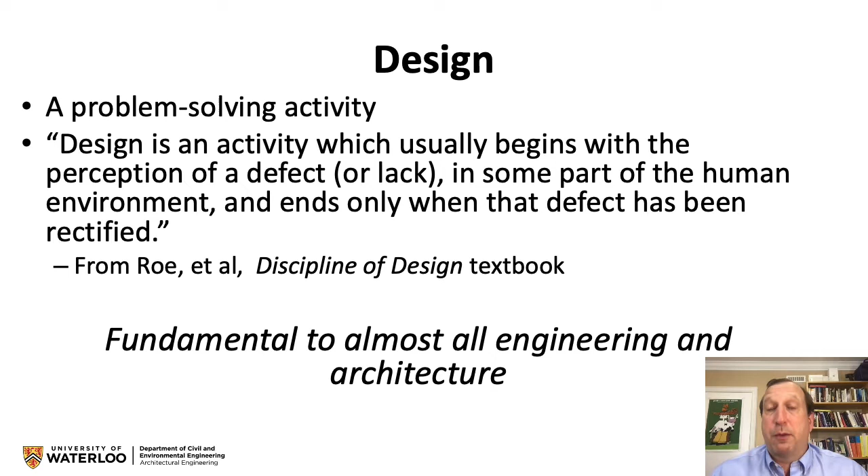A great textbook by a number of University of Waterloo professors is called The Discipline of Design. And in it, a more formal textbook type of definition is given. Design is an activity which usually begins with the perception of a defect or lack in some part of the human environment and ends only when that defect has been rectified. And that's intentionally a very broad and formal definition. So whatever you want to define and how you tweak those words, at the end of the day, design is a fundamental part of engineering and, of course, also of the practice of architecture.

Now, one has to also recognize that design is an activity, meaning a verb. Design can also be a product. That car is a good design. But design is also the set of drawings and specifications that are used to make a product. So design has a number of overlapping and correct definitions and uses in the everyday language. But one thing that's important to recognize is that design is not an aesthetic activity alone. Obviously, aesthetics play an important role in many design decisions. However, design is much deeper and broader than that.

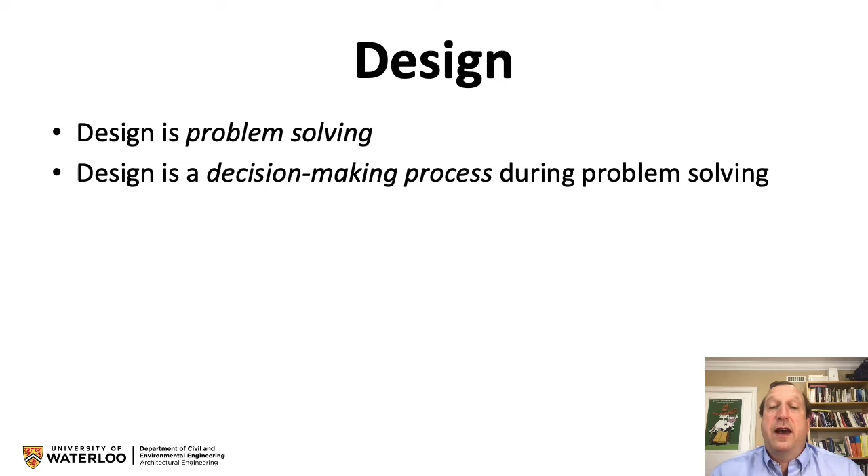So, just to start with, as I said, design is a problem-solving activity. So design is not something for sport or entertainment or spiritual upliftment. Design is solving a problem. And since we're talking normally about humans doing the design, it is a design of a human concern. So when you're doing a design, the major activity that one does as you follow through the process is you're making decisions. You're solving the problem, but making decisions about what's important, what's not important, what the problem is, what the problem isn't. All of those things are decision making.

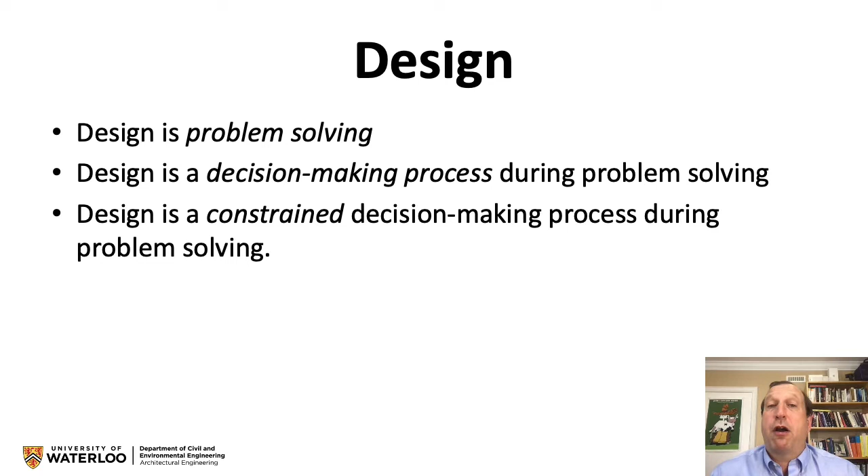And so a lot of the theory of design is actually, when they study the process, they realize it's a decision-making analysis that needs to be done. How do you make the decision at every step of the way? And there are many decisions in real designs. Now, it's also a constrained decision-making process. So one of the things that differentiates design from, say, art is that design has constraints. You don't have a lot of time. You don't have enough knowledge. You don't have enough money, etc. You can't make it beyond a certain weight. It can't burn. All kinds of constraints, of which there can be identified many hundreds and thousands for most common products that are designed. And that includes buildings.

So design can be applied to the process of planning. You're planning a path from your current location to the nearest Starbucks to get a coffee. That could be a design process because you're solving a problem by making a series of decisions, and maybe you remember your decision for that design, or maybe you even write it down as a series of steps for someone else to go get you that coffee at the nearest Starbucks that you know where it is. So the design process almost always involves those types of instructions and planning. And also, it can be part of creating a thing.

Most of the challenge of modern technical design is that we separate the creation of the object from the design. So there are two separate stages. You design the shape of, say, the binocular case, and then you have to design the process by which it's made, and then you actually do the execution of making the case for the binoculars. And in the building industry, we design the building, and then we design the process by which it will be constructed. And then there's a lot of executing of actually building the building.

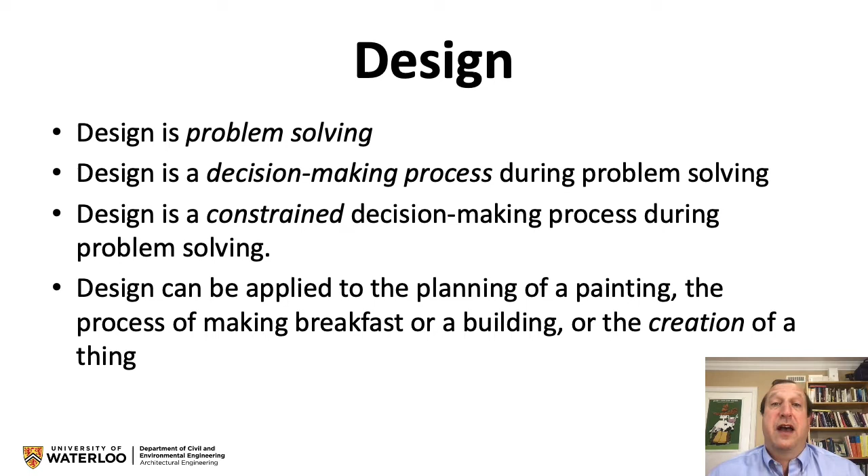And during that process, in real life, we find out that we maybe haven't totally sorted out the design, meaning what is the building, or we haven't totally designed the construction process, that is how we will build it. So we have to continue to make decisions during the construction process, which is actually an extension of the complete design process because we aren't done yet.

So if we want to describe what design is in sort of maybe a more applied way, another tack we can take is to say that the design of physical objects, as opposed to systems or software, involves the selection of materials, forming or shaping them, and then arranging them to meet a particular purpose, to solve a particular problem. So let's go over that. Select materials, form or shape them, arrange them relative to each other to solve a problem. That is much more of a description of the building design process right there.

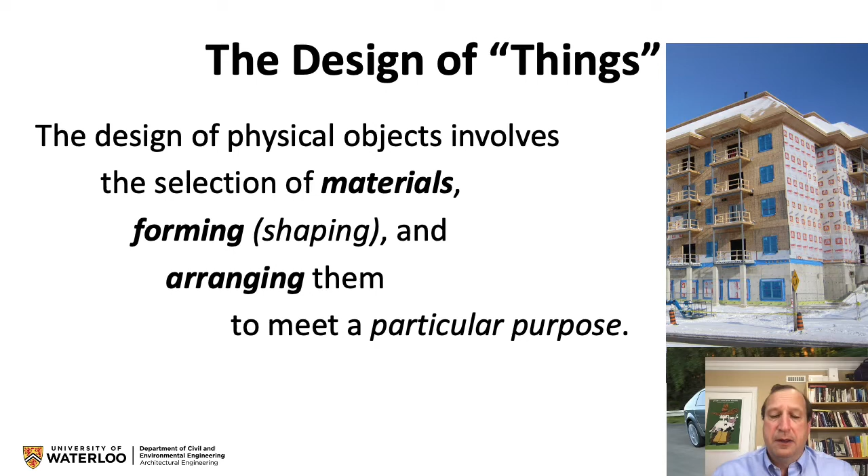Now, there are numerous books which I would welcome you to read, and I have at least 50 of them, on the design process, technical design, engineering design. And they all have variations on this theme, and it's worth thinking about and understanding those different variations. But I'm going to move on now from the definition of design, and I'm going to start looking at some examples and some case studies.

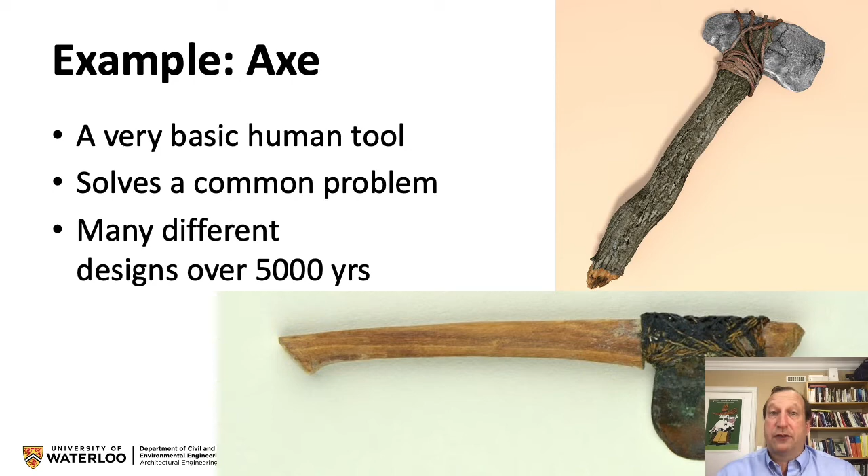So a pretty old, in terms of human history, design of a tool is the axe. It's very basic. It's been around for tens of thousands of years in the archaeological ruins of human habitation. And it solves a common problem. But I think we have to be careful that when you look at the designs for axes over the last 5,000 years, you will find that there are a lot of different designs. And if you look at the designs that are available today by doing an internet search, you'll find there's also a large variation. So why are there so many variations if they're solving the same problem?

Well, the first step there is they aren't solving the same problem. Certainly, the types of axes we have today are quite carefully designed for very particular problems. So there is the firefighter axe, which is meant for chopping through walls and roofs and car doors in terms of freeing someone from a wreckage or a fire, which is a very different type of axe than would be the type used to split pieces of wood into smaller pieces. There's one that's meant for peeling the bark off of trees. There are types of axes that are meant to split large and difficult to split chunks of wood. So we end up with a whole bunch of different solutions.

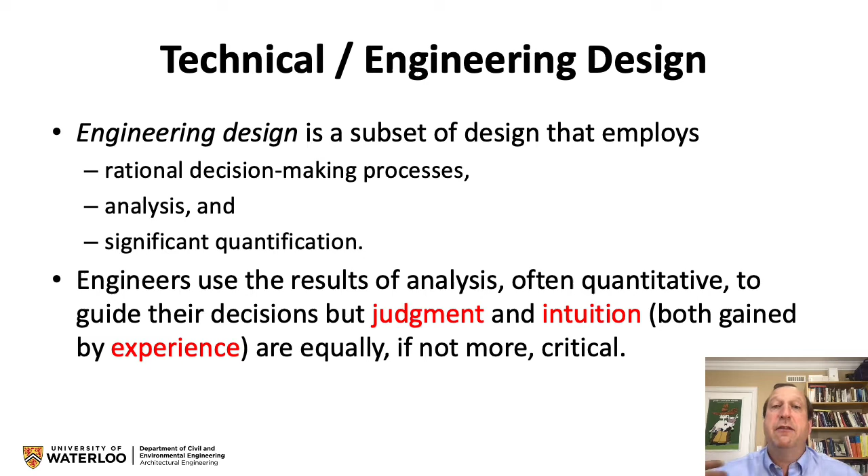The best way to get judgment and intuition is by experience, which means doing a bunch of designs, evaluating their success. And of course, since we can't do all that many designs, we learn the most by looking at other previous designs that are similar and try and understand what resulted in that design quality, good, bad, indifferent, and how would that sort of decision making influence my current design.

So the use of rigorous decision making will often end up with coming to similar conclusions. This is not bad design or a lack of creativity. This is good design, and it is showing that the type of solutions might actually properly be very similar. So trying to steer a design in a different direction, or sometimes we use the term innovative, that's dangerous because it could push you away from the best design. Just to be different doesn't usually solve a problem.

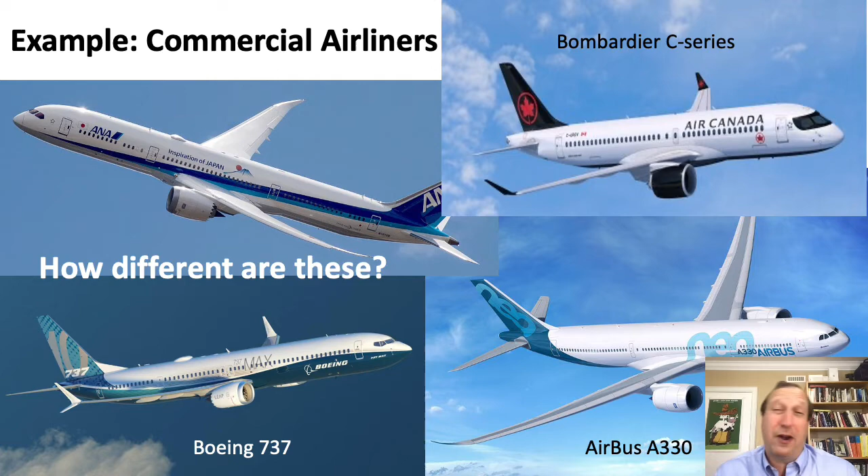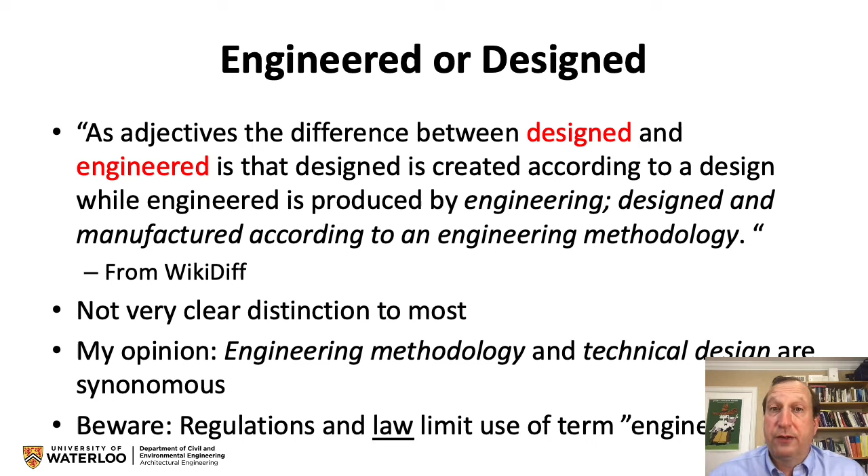And part of those reasons have to do with the law, in that when we are being asked as professional engineers to design a building, it often does rely on engineering, which means some analysis, some rational method, and compared to physical laws, following the physical laws, comparing to physical performance. There's an expectation in the law that when you are asking for an engineered design, that is the process. You can't rely on what your gut says or what your heart demands.

This is another expensive object. I'm just showing it closer to Earth. And many of you may not realize, but these types of offshore oil rigs routinely cost more than $5 billion. And a majority of that money is tied up in engineering the manufactured object, and very importantly, the process by which that product is created and delivered and brought online as a functioning object.

This one happens to be in Canada's offshore area on the East Coast, Hibernia, and it's $10 billion. It's a bit more expensive because A, it's big, and B, the weather sucks. And so dealing with icebergs and ice storms and hurricanes and all the rest of it means that these offshore oil rigs were very expensive.

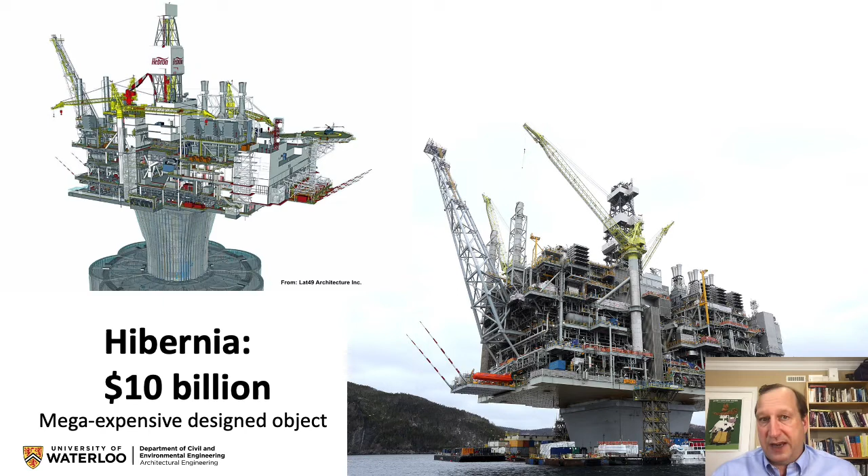But also, as we move to a world where burning and extracting carbon is less and less desirable, I hope you can see that we have developed the technology and the design ability to solve some pretty incredible problems, and the ability to generate the funds, $10 billion in this case, to justify them. And so some of the newer low carbon technologies seem like they're rather exotic or rather expensive or rather large, but that's only in comparison to, say, everyday life, not in comparison to the fossil fuel industry, which has taken on the largest, the most expensive, the most technologically demanding problems up to and including spaceflight. So we can apply the same design and technology for other reasons.

So when you have projects of this scale, you can imagine that design is almost always engineering design. Whichever profession did it, whether it's architecture, technologist, whatever, we need to use rational analysis and quantify our decision making to justify the expense and reassure the investors that the expense is going to be protected.

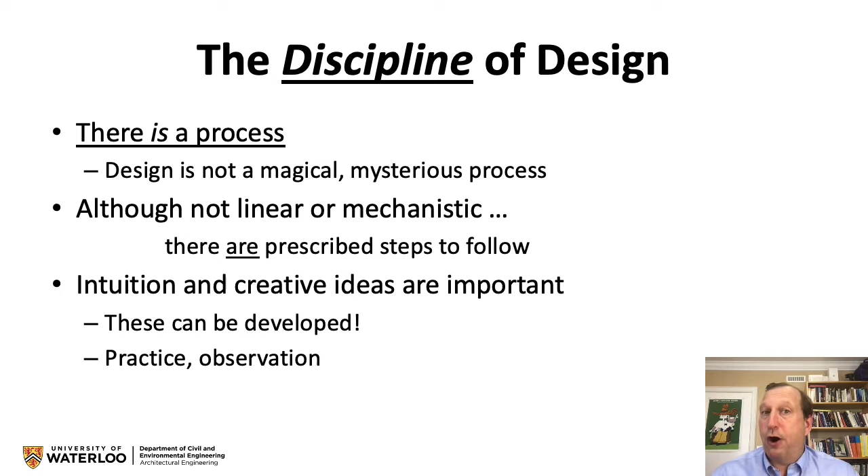So this brings us all to, let's now talk about the discipline of design. And that word was carefully chosen in the textbook because design is not some sort of lightning bolt from the heavens that inspires you. Design is a process. And in fact, a lot of good design comes out of simply following through on a good process. That doesn't mean that creativity, inspiration, intuition do not play an important role. They do. But it's not just about inspiration and intuition, both of which are developable. It is actually a pretty clear process.

So there are many ways to break down the process, but I can tell you there are entire textbooks that explain this process, and some of them break it down into 27 steps, some of them break it down into 5 steps. I've cribbed together, by reading all of those, a 5-step process that works well for architectural engineering and a fair number of other processes as well.

But the first step, I think, is pretty clear: defining the problem. And then you review previous designs, called precedents. You look for solutions that might solve that problem. You evaluate your proposed solution, and this is where the engineering analysis, computer simulation, and various calculations come in. And then when you've decided that you have the best design you're going to come up with, you document what that design is so it can be implemented. In our case, it can be built.

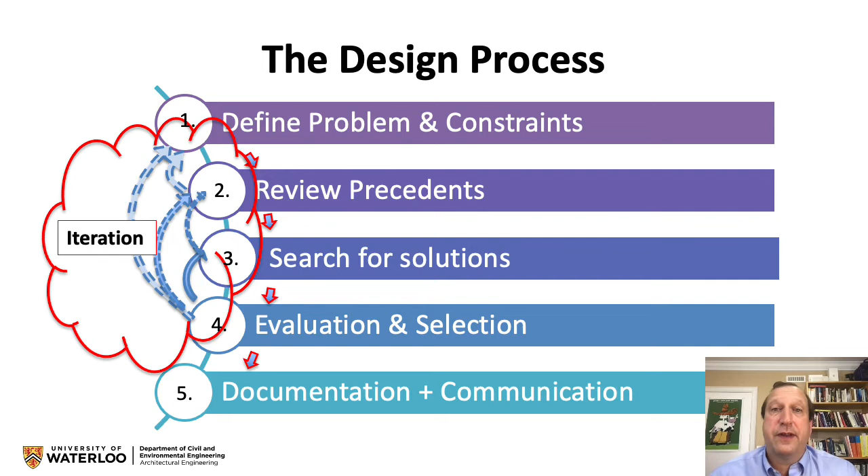What's important to realize is that there is a whole bunch of iteration, and that when we define the problem and identify limitations or constraints on the design, we don't just leave that forever. As we go through and look at previous problems that were similar and the design solutions, we may learn that, oh wait, there are these other restrictions, constraints. There are other problems that we need to solve at the same time. And that means you might then cycle back from step 2 to update step 1. And then you go to step 3 in terms of looking for solutions to the problem.

Now, when you've searched for solutions, and by search for solutions, I mean you create them, you look around the world for ones that are exactly what's needed for your problem with your constraints, you may end up having to go back and look for other precedents. You may have to go back and change some of the constraints. And that's why these arrows are important, to say sometimes you skip over and back and then revisit and adjust. And so the process isn't this simple linear thing.

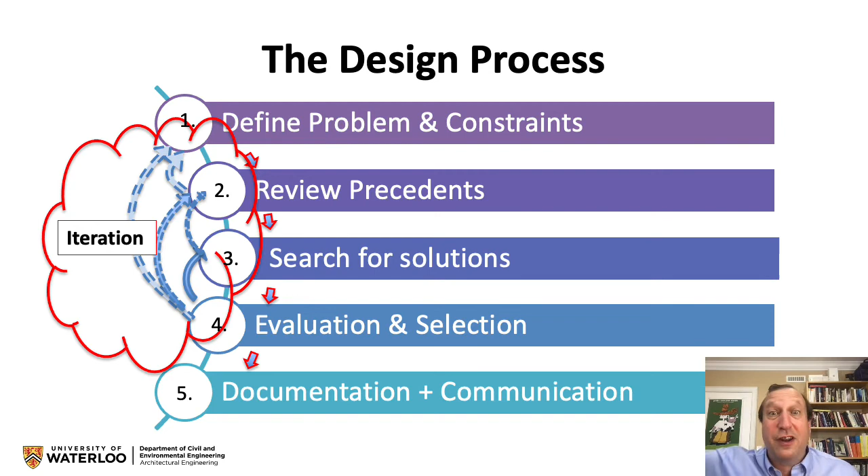And I can't tell you how much time you should spend on each step. But I can say there is a reason to do every step. Some design projects will require you to spend a lot of time on one step and not much on another. And other design projects will invert that, and you'll spend a whole bunch of time on a different step and no time on that step. So let's just look a little bit at these 5 steps.

The problem definition and identification of constraints is really important. Defining the problem is far more important than most people recognize. And so being able to really zoom in on what problem do we need to solve? This is often the place where genius comes in: people see a different version of the problem that hasn't been articulated or developed before. And so that sets them on the way to a really effective design solution because they had nuance in their problems. And in that problem definition, you need to do this very much with an open mind and actively try and look at it from different perspectives.

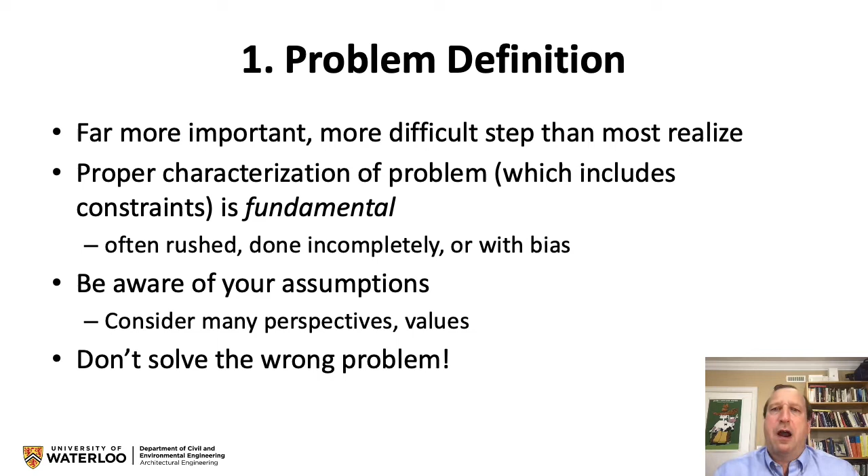Some of the simplest examples of that I can give you: don't design things that only work for right-handed people, because there are left-handed people in the world and not a small number of them. Don't design for people who are 5'11" tall, because there are many, many adults in the world who are 5'2" tall. And if you intend to include children, then you now have to start designing for 3-foot tall people. And what about people who can't walk very well, or need a wheelchair or a walker, or use a cane, or have bad vision? All of those factors actually add constraints to your design solution and are a better refinement of your design problem that leads to better and different solutions. So various perspectives is the best way of getting this.

I'd mentioned that this is a well-known problem of not spending enough time defining the problem. In fact, at the University of Waterloo, which is home to hundreds of startups, it has been observed that it is such a problem that they have created the Problem Lab. One of our faculty who had spent a lot of time in the startup world actually went out and raised some funds from Silicon Valley venture capitalists, etc., to start this lab, because the problem is that people are not defining the problem. They come up with a solution as an app or a widget, and they've never spent the time figuring out what the real problem is. So you can go Google this, check it out, and it just shows how often this step is jumped over or given short shrift.

Constraints are a critical part of your design. Depending on the constraints, the exact same design solution could be a good one or a bad one. So when you're starting a project, not only do you need to define the problem very well, you also need to document the constraints. And really, it's helpful to write it down to keep it aware all the way through the process of what is constraining your design solution.

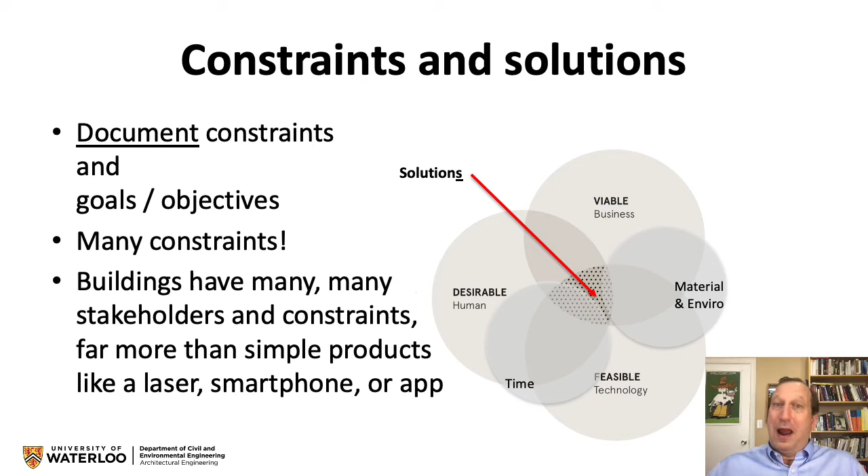And when you're doing that, you're often going to collect some of those constraints together, put them in buckets. Often you're doing this in a brainstorming process to say, what are all the limits on what you are allowed to do? Now, some of those limits that you can quickly identify and even quantify in many cases are things like cost and schedule and safety, regulatory compliance, skill available, knowledge available, technology available, materials available. All of those deserve to be on most design lists as constraints, because there's some limit on all of them.

Now, again, I go to comparing art and design. This is a quote from David Pye, a famous author, saying the thing that distinguishes design, or technical design, really, from such arts as painting and sculpture is that the practitioner of design has limits set upon his freedom of choice, meaning they can't just choose to make a very heavy object or a very large object or a very expensive object because there are real constraints.

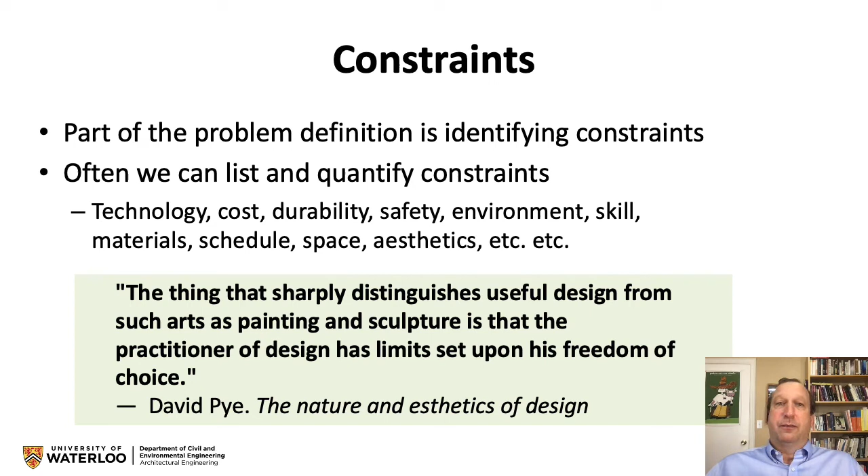Now, precedents is step number 2. Step number 1 was identifying the problems and constraints. Step number 2 is look at what others have done before you. Learn from the successes and, just as importantly, the failures of others. So it's useful if you can find failed designs, sometimes hard, but certainly you can find successful designs that tend to be close to what you're working on. Just remember, before you can think out of the box, you need a box. And so that box is your precedents.

How do people normally solve similar problems? So what we can do is look in other industries or at different scales for what solutions have been done. Look at how people did it at different time periods, because you might get lessons there. Now, you need to analyze this and make sure that for the precedents you're choosing, you understand which constraints are different, what has changed since that design, how different is the problem, and that usually explains why their design is not perfect for your problem. But identifying that difference is a useful thing and can help you come up with a better design.

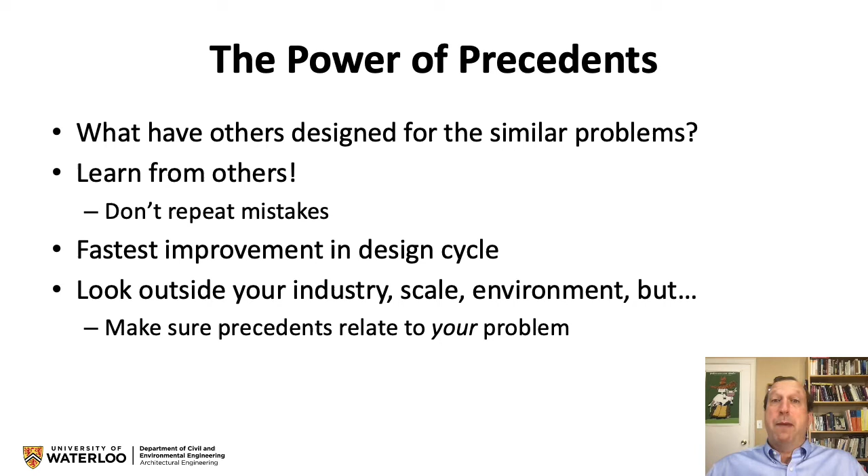So now we have to go and look for solutions. And the solutions that you're looking for often seem somewhat magical because they're pulled out of the blue sky. But they're not really pulled out of the blue sky. After you have done a good job of defining the problem, identifying the constraints, and exploring many previous solutions, well, that's not blue sky anymore. You are now steeped in the design process, and many times then new solutions can be proposed. Now, when you propose a solution, you don't know that it's a good design. That's the thing that comes from nowhere, is the solution.

And now you need to assess whether it's a good solution, which is why this quote from Thomas Edison, and actually he was a person who used a real process. He hired hundreds of people who tried dozens and dozens of prototypes and variations on particular problems that they were working on. It was a complete industry to come up with invention. And this process was very much used by Edison. He says, "I have not failed. I've just found 10,000 ways that won't work." And each of those ways that don't work is useful information for others.

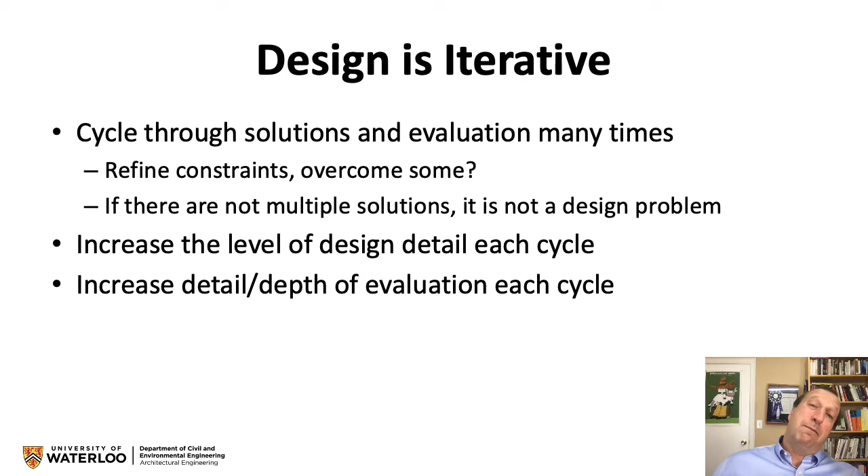So, as I've said, you're going to iterate between these levels, and that's very much something that happens as you're coming up with proposed solutions. And also, you propose a solution or 3, you pick one, then you get deeper into the one that you think is the best. And as you add detail to the design, you discover new questions that need to be answered, which may push you back to the problem definition, push you back to the constraints.

So as we go from cycle to cycle, as we iterate through, we are going to make some of our designs worse. We'll make changes and we'll find out they're worse. And therefore we'll go back to the first design or try something else. But trying a bunch of solutions is critical, because we can often not be sure that a design solution is the best answer. The best we can do is to come up with 2 design solutions and show that solution A is better than B.

You still don't know A is the best, but you now can be sure A is not the worst. And if you have 5 solutions, A, B, C, D, and E, you might say C is the best. A was almost as good. E is a total dog. As soon as you start having multiple solutions to compare and contrast, you have a much better idea of the size of the solution space and where your best solution fits within that.

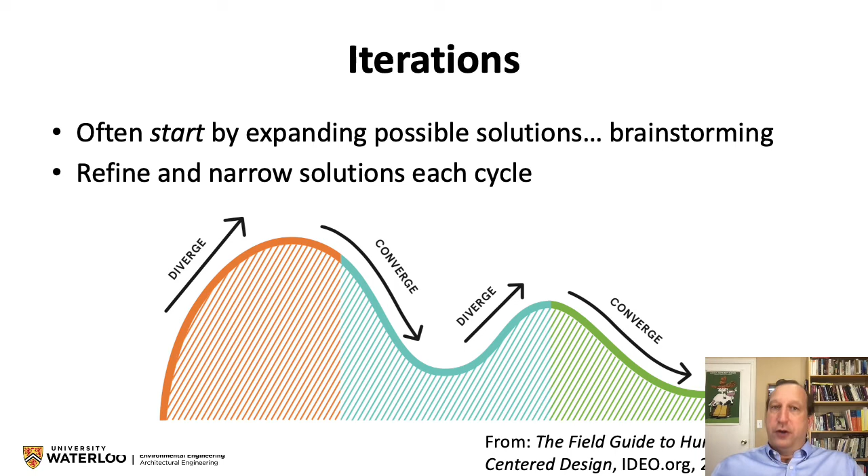So we often expand options as we begin the design cycle. Then as we analyze and compare to constraints, we weed some solutions out, tweak some solutions to have fewer, and then we go through another cycle of this. One of the realities that we've learned and documented about the design process: as we go through each cycle of design, we learn more because we've been working on the project. We learn more precedents. We understand more about the constraints, more about the problem.

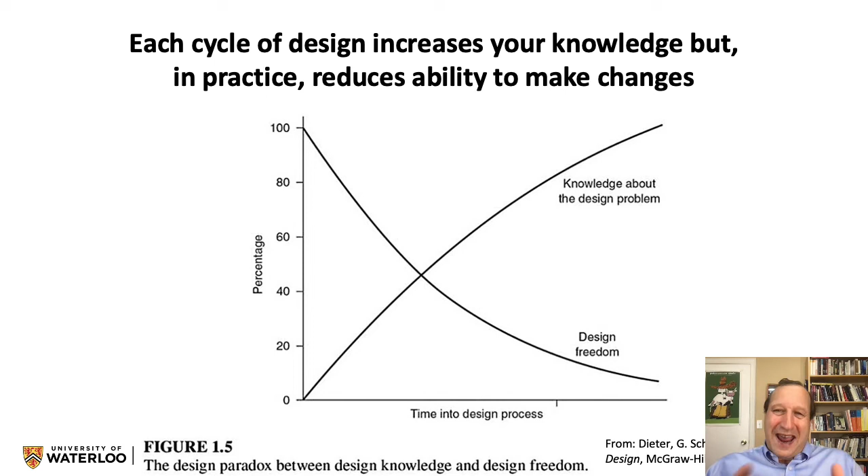But as we work through, we also tend to have less freedom of design because we're running out of time and we're running out of resources, and we have to make decisions because, at the end of the day, particularly engineers, we have to solve the problem. And so we end up learning more, but not always having so much flexibility anymore.

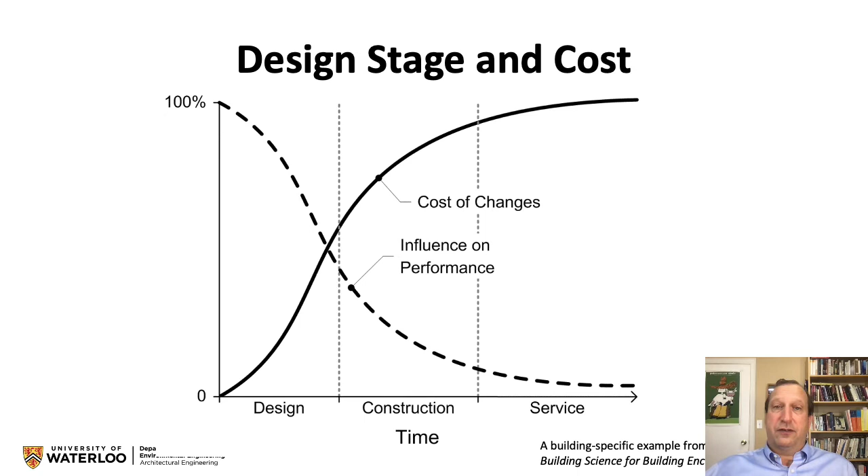Step number 3, this is the search for solutions. I can summarize here that we're going to have multiple solutions, and it's not enough to have one solution that works. We need numerous solutions so that we can compare them and rank them. The challenge in our design, because of this time factor, is that we want to get quickly into our design space, quickly evaluate rough designs so that we can, earlier in the process, zoom in on viable, likely solutions.

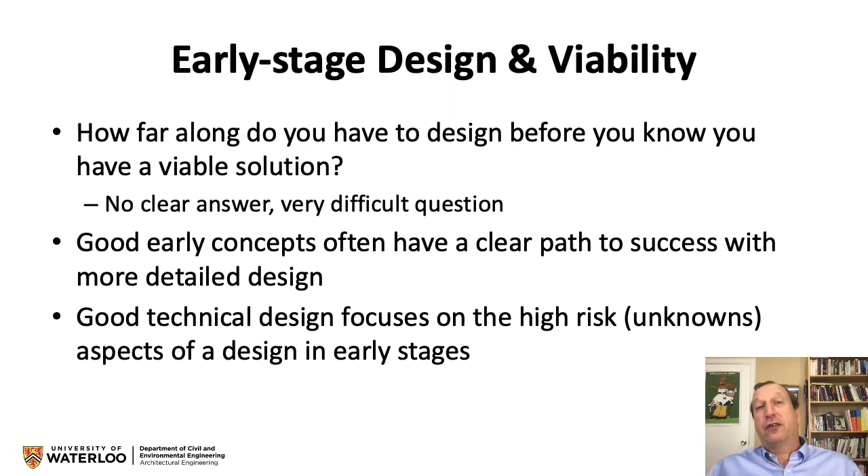And this is what actually tends to happen in real technical design projects: we focus on the biggest bang for buck, most uncertainty at the beginning of design, leaving accepted and understood things to later in the design, where we know the answer better up front. So these are the subtleties of experience in design, design in a particular discipline, that let us know: is this a good first choice or a bad first choice? What should I focus on?

Now, one of the things I thought I should mention here is that in our design solutions that we propose, complexity is often a problem. In the modern world in particular, we have so many options for materials and systems. We have so many people involved, so many constraints that limit our designs, that just managing that complexity is a major deal. And that's why striving for simplicity at the early stages can be a very powerful strategy. Just try and keep it simple at the beginning.

I love this quote from John Gall; there are variations from various people, but he says, a complex system that works is invariably found to evolve from a simple system that worked. The inverse proposition also appears to be true. A complex system designed from scratch never works and cannot be made to work. You have to start over, beginning with a simple system.

And this partly can come out of your assessment of precedents, but when you look at a modern car, there's no way that somebody could start to design a car with today's complexity based on a clean sheet. The way the car developed was over generation after generation, 100 iterative design models where we kept adding this, adding that, tweaking this, improving that, removing a little bit of something.

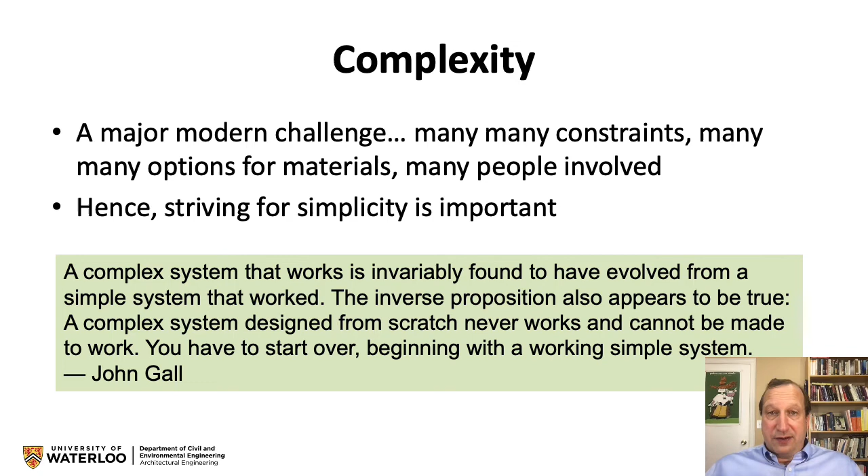But that is how we end up with these complex modern projects. It's not a one-off. And when we try and come up with one-off new solutions that are that complex, John Gall says, and history would support him, there are very few successes. This level of complexity almost always fails.

So step number 4, after you've sort of worked through a number of reasonable solutions to consider, is to evaluate that proposed solution. And this is where we will take you back to step number 1 and say, does it solve the problem you identified? Does it respect the constraints that you've identified? And that's how you know if the design is a good one. Is the one you proposed, does it meet those requirements?

And how well does it meet those requirements at the beginning relative to another design proposal? And so this is where testing and simulation and calculation and analysis are used, because they're all trying to assess the performance of this product without actually having built it. So it's all done in computer space or paper space. And we say, using what we know about physics, can we predict how this object will perform? And then compare that performance to what the original design objectives were.

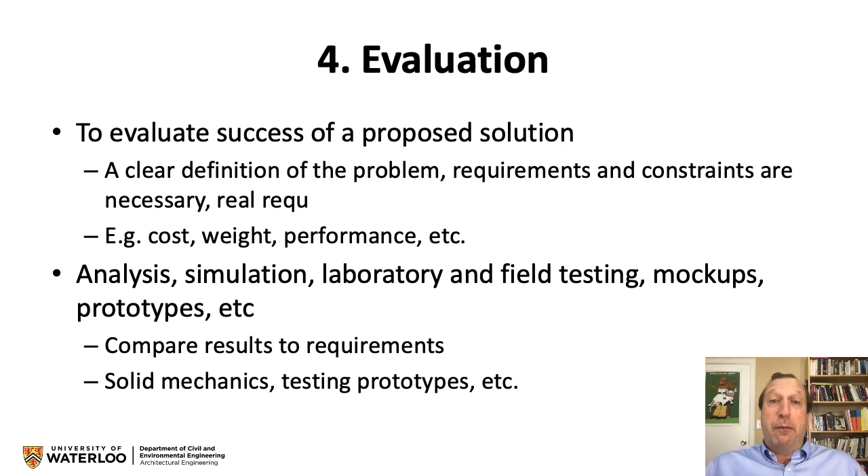As you probably can imagine, a lot of design is not amenable to this sort of quantitative analysis and comparison. So we have to come up with rankings, good, bad, indifferent, high, medium, low, stuff like that. Because a lot of things that matter in design, we haven't yet figured out how to put a number onto, or certainly not how to calculate.

Now, once we're done and we've actually analyzed our design and can convince people that this is a design that solves this identified problem with these constraints, and here's my analysis as to why it does that, now we need to document what that actual product is. So whether it's a hairbrush or a high rise, you now need to start making the drawings and the specifications that translate your concept of a design into a workable set of instructions for others to manufacture it.

And that, in the building industry, is drawings and specifications, which is why, in architecture and engineering, it's said, we do not build buildings, we produce contract documents. Now, those contract documents are to make a building, but it's still not a building.

So let's have some takeaways from this broad and long presentation that introduces you to the discipline of design. First, it is a discipline. There are steps that should and must be followed. You can improve the likelihood of good design outcomes if you follow these 5 steps or the sub-steps within them. Beware just darting off to creating solutions and then asking what the problem is. Beware getting trapped by, if it looks different, it's a better design. That's the innovation without purpose. Or skipping over steps because, I know all the precedents. Maybe you do, but then you should document them.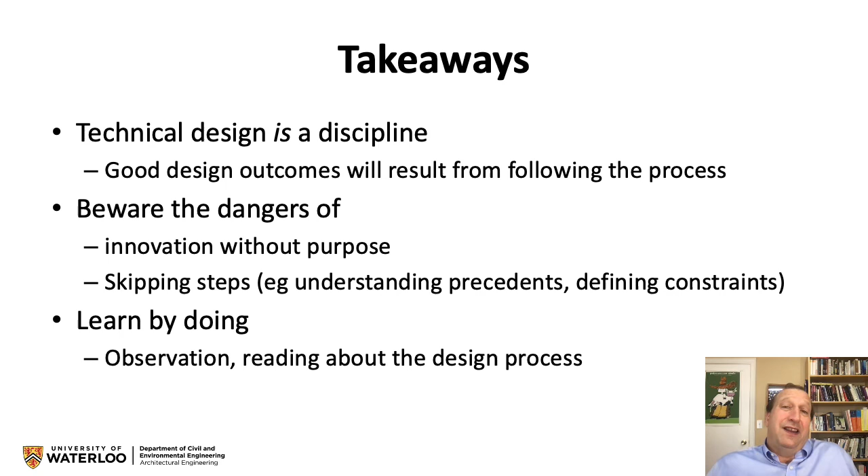And many times, bad design is a consequence of the people who had a different problem than you thought. The problem they're designing for is making their job easy, or making the hotel room cheap, or making the electronic setup easy to buy and install, not easy to use. That kind of thing.

So I'm hoping that helps introduce you to design and makes you think of design as a discipline and gives you a hint as to why you'll be asked to go through these 5 steps repeatedly and routinely in any kind of design exercise, is that there's some very good reasons for those 5 steps. They're critical to good design.